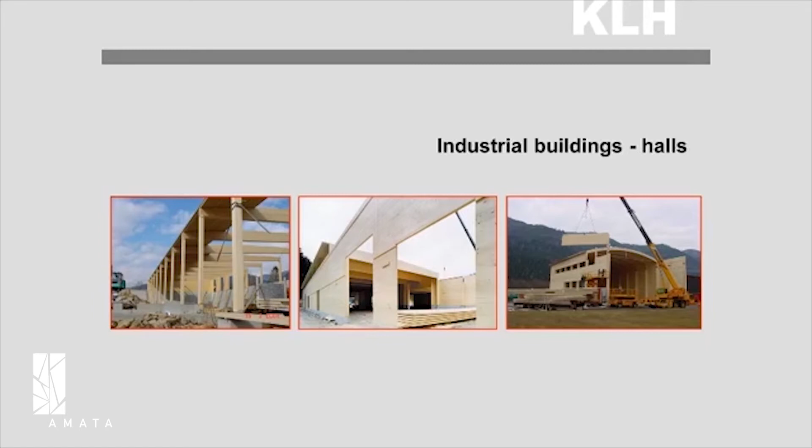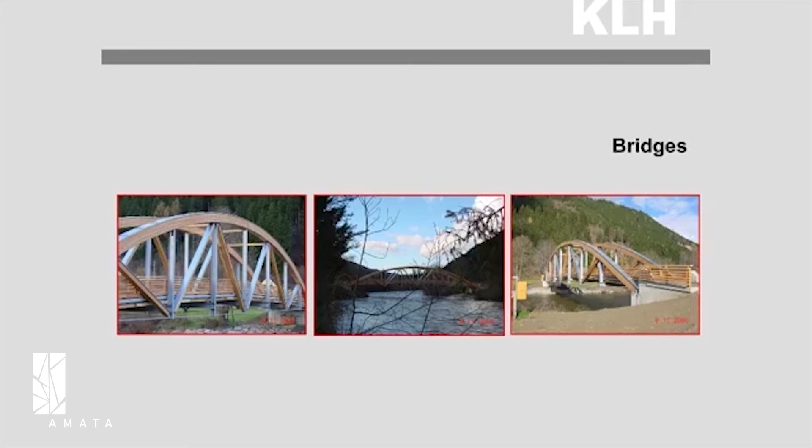You have the residential buildings. You have office buildings, hotels. That is a very important market because you are very fast in the construction. You have bridges. You have towers, and not only observation towers. So in 2012 we did an 80-meter high tower for a windmill in Hanover.

So the first project was in Vienna, from 4, 5 and 6-story high buildings, and there is also one project in Sweden that we did, that was the first in massive wood of 6 stories high. So the first was this building with 4 floors in Vienna, 112 flats, 7,400 square meters usable floor space.

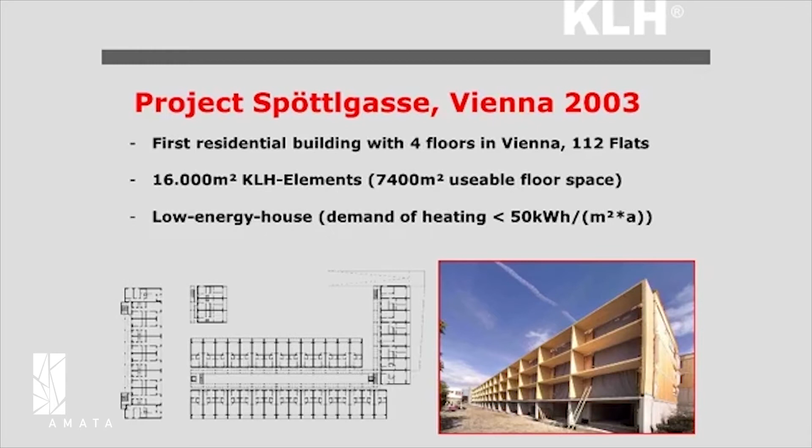This is a low energy house, so the demand of heating, that is not really a big issue for Brazil, but it could be also for the cooling. So we have to protect for heating, and you have to protect the other way around, for cooling. And so it's under 50 kilowatt hours per square meter and year.

So this is the construction system, the structural system. So you have the outer walls, the bearing inner walls, you have the separating walls, you have balconies. They are always set before the construction. You also have a combination with the glulam. So if you have great openings, you always have the solution with the glulam, so you can combine it.

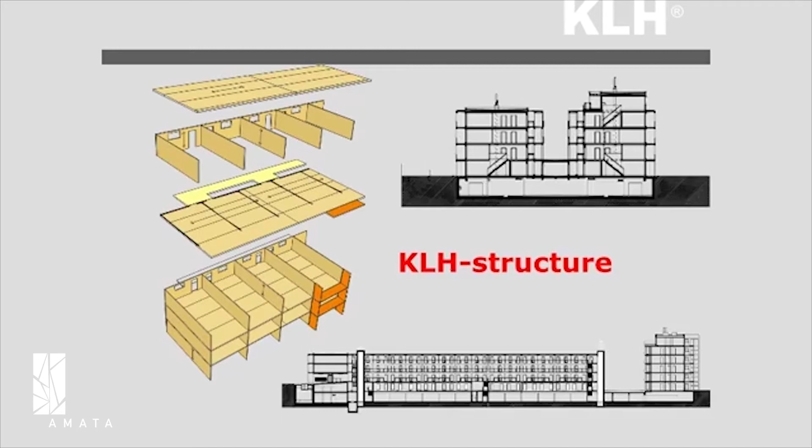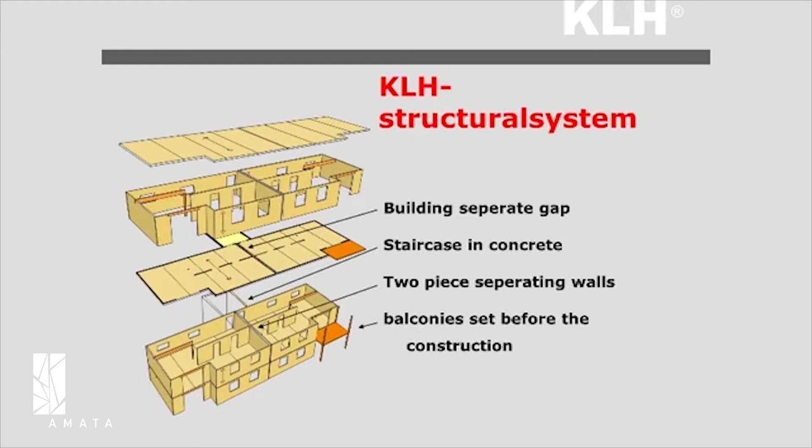Then you have the build-ups. Normally, for the separating wall, to fulfill the sound requirements there is gravel, then isolation, and a kind of concrete, and you have the suspended ceiling. So that is more or less the common build-up in Europe to fulfill all fire and sound requirements.

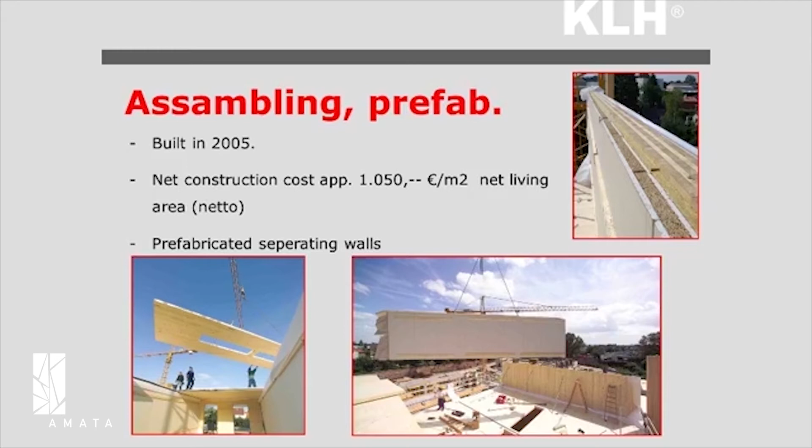So the net construction costs were comparable to concrete. We had these prefabricated separating walls. So you see, for example, this first block was done in less than a week. For erecting, you have here this prefabricated installation. So everything was there, the water, heating, electrician, and this shaft goes all the way through these 4 floors. You see the shaft again.

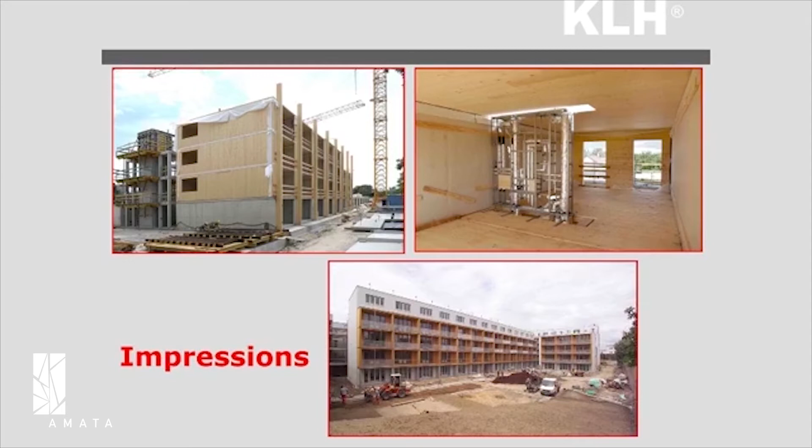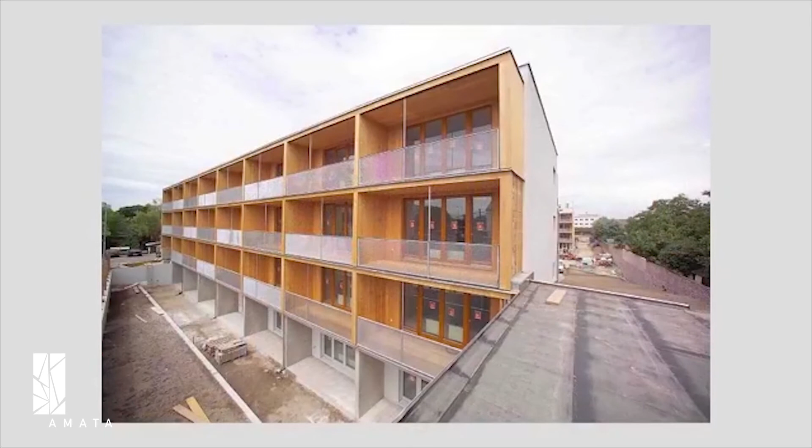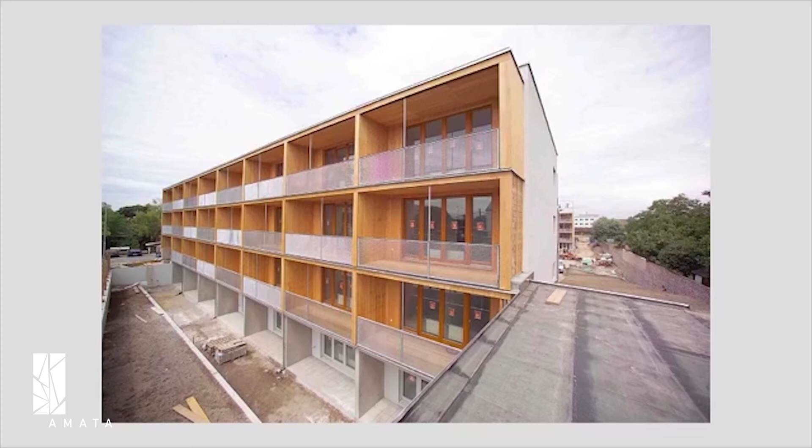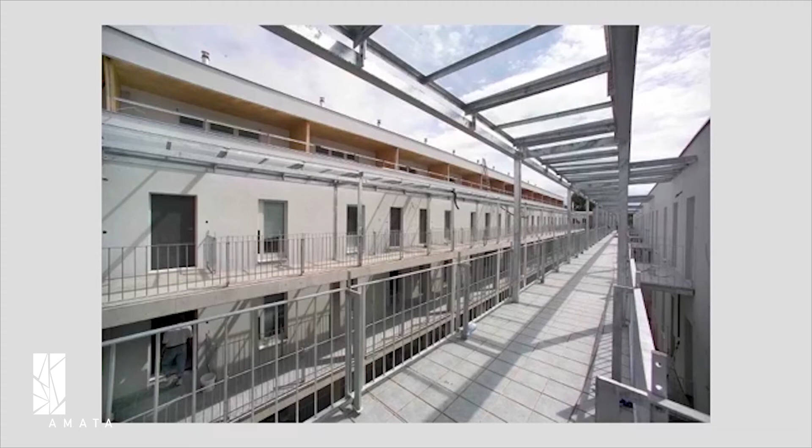Then you have the protection for fire. This is prefabricated. And then it's finished, so you have the balconies in wood, and you have all the facade walls with isolation and cladding. Inside you have this open floor for entering into the apartments. This is the finished apartment. Everything in Europe is turnkey. So the floor and the ceiling and the walls are finished.

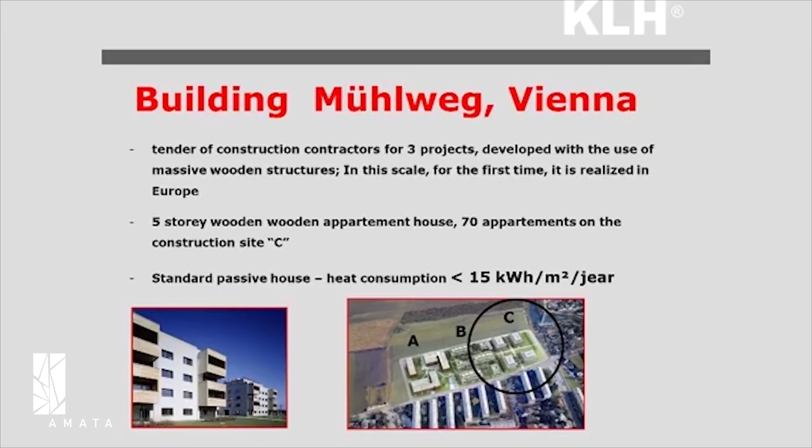So this was our next project. This was also in Vienna. It was 70 apartments, and this was a standard passive house. So before we had 50 kilowatt, and now we have below 15 kilowatt per square meter per year. And the erecting time was 14 months turnkey. And we had these prefabricated exterior walls.

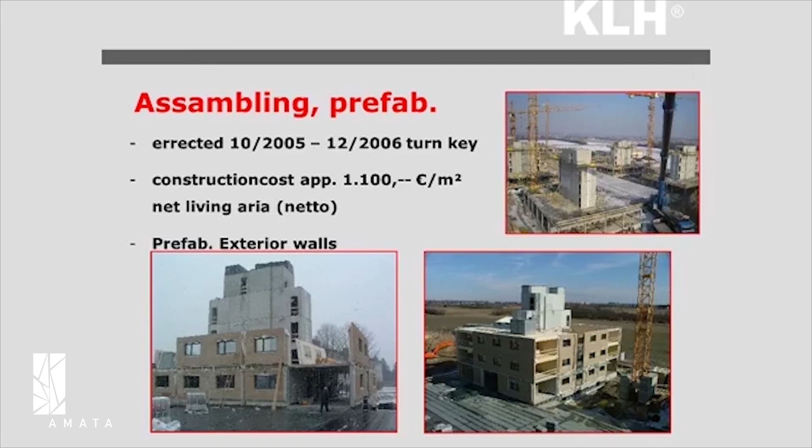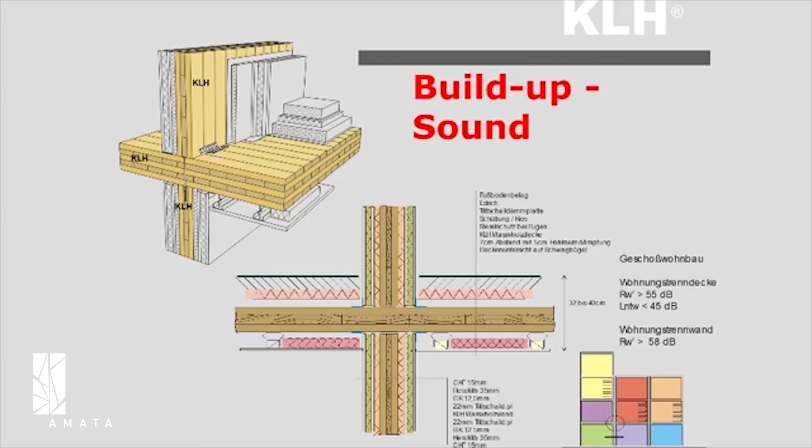So that was prefabricated in the factory. The windows were there, the isolation, and the gypsum board inside. The build-up is a little bit different, but more or less it's always the same. So you have this sound protection, and this was always measured not in the laboratory, but on site. That is the finished impression.

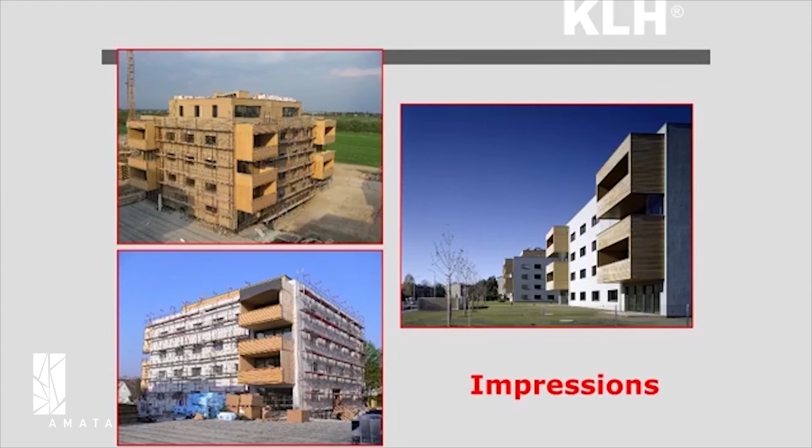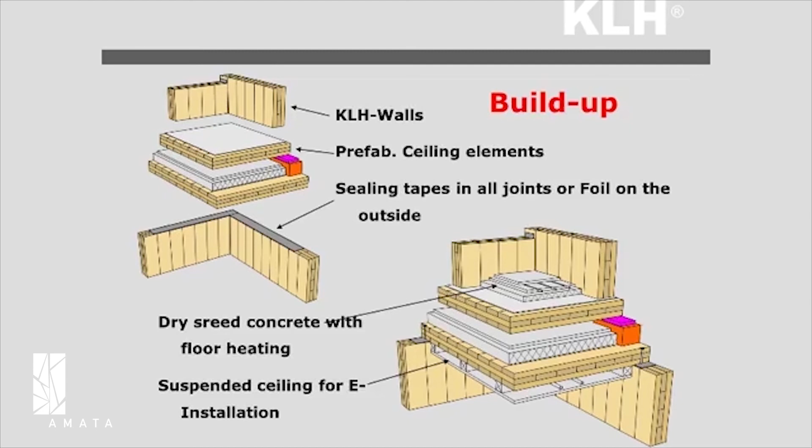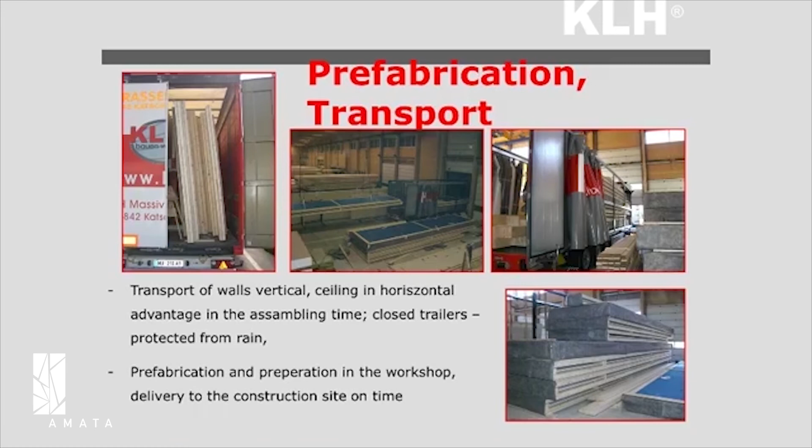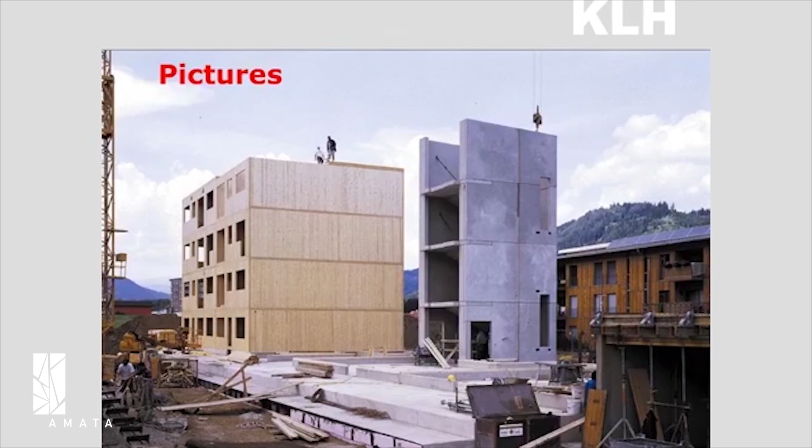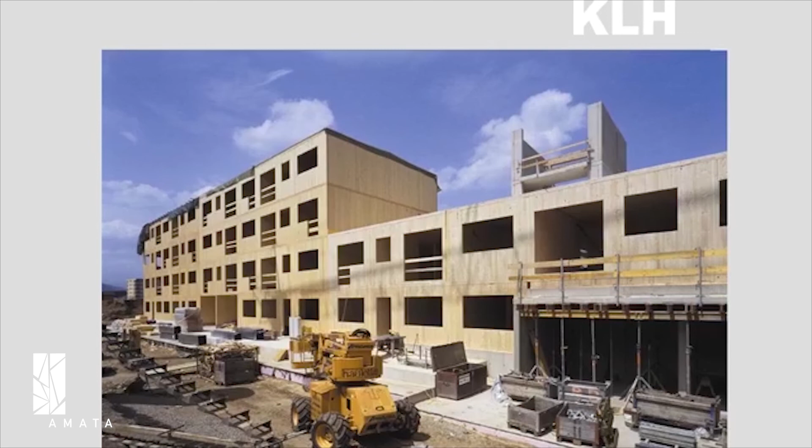This is a little bit on site, so you see again the erection. These 8 apartments you will erect in more or less 1 week. The staircase, for fire, is always or mostly made in concrete. You have the separating wall, the inner walls, the ceilings, then you have the windows, and then you have these prefabricated balconies that are put on these steel elements. So they were also prefabricated. All these blocks were done in KLH.

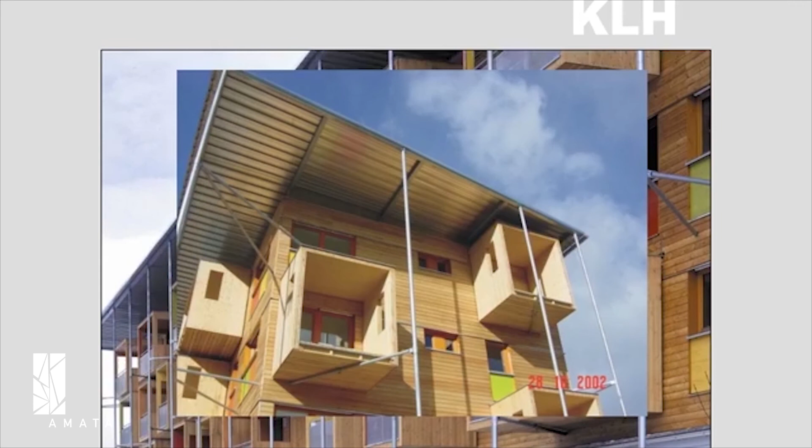So this is the finished building. You see here the wooden facade outside with the balconies and the very, how to say, cheap roof construction with steel elements, so you can combine it in a very good way. And then at the end, some projects got the architectural award.